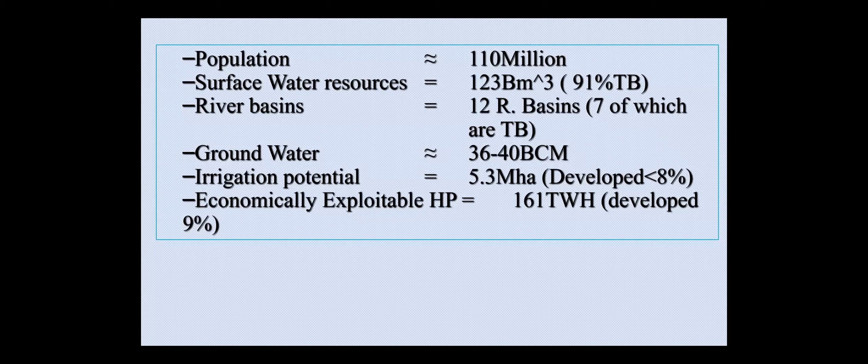This section gives an idea about the key challenges of water resource development in the country: rapid population and economic growth, which is significantly demanding food, energy, and water; and high spatial and temporal rainfall variability, which is also a critical challenge for water resource development, particularly in the agricultural and energy sectors, because of flow variability in the rivers.

High dependence on biomass - it's estimated that more than 70 to 80% of the population depends on biomass for energy - leads to deforestation and erosion. There is also a low level of water infrastructure, meaning few storage reservoirs or dams, so it's not possible to regulate incoming floods within such structures. This is also a challenge for water resource development in the country.

According to a World Bank study from 2006, Ethiopia's primary water resource management challenges are extreme hydrological variability and seasonality, and the international nature of its most significant surface water resources. This justifies why the World Bank has endorsed the need to develop more water storage reservoirs in Ethiopia because of these challenges.

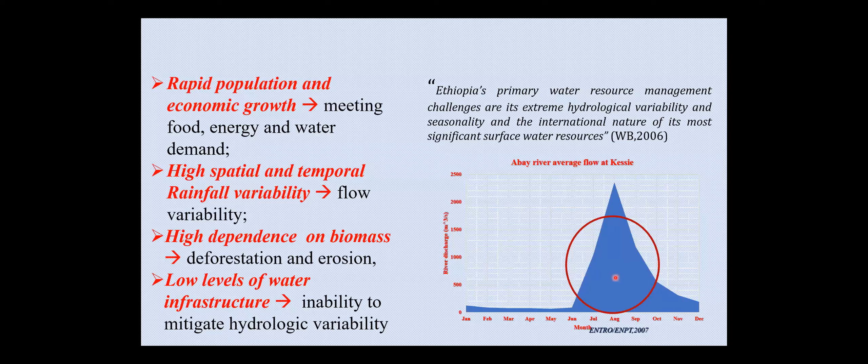This data, captured from different studies, shows the insecurity of food, energy, and water in Ethiopia. For instance, the first one on food security and life expectancy, a study done in 2008, shows that compared to neighboring countries like Sudan and Egypt, Ethiopia has lower life expectancy and lower average daily per capita calories, estimated at less than 2,000, while the others have more than 2,000 or even 3,000. This shows the food insecurity of Ethiopia as of 2008.

This figure gives an idea about access to electricity as of 2005. Compared to other developing countries in Africa, Ethiopia's access to electricity at that time was less than 20%. You can see Zimbabwe, Nigeria, South Africa, and Egypt for comparison, showing the access to electricity, or energy demand, at that time.

The reservoir storage capacity per capita, as I mentioned earlier, shows that Ethiopia has less storage capacity or water infrastructure. Compared to other countries in Africa and the world, Ethiopia has about 38 cubic meters per capita, compared to South Africa's 687, and North America's 5,981. This shows it has justifiably less storage capacity compared to other developing or developed countries.

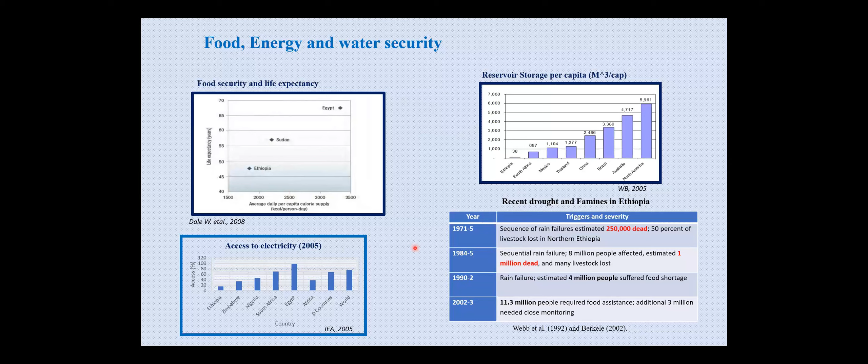This is just to give you an idea of the first dam in Ethiopia, called the Aba Samuel Dam. It was commissioned in 1939 with an installed capacity of 6.6 megawatts. It is a concrete masonry dam, located on the Akaki River, tributary of the Awash River, and its height is about 22 meters.

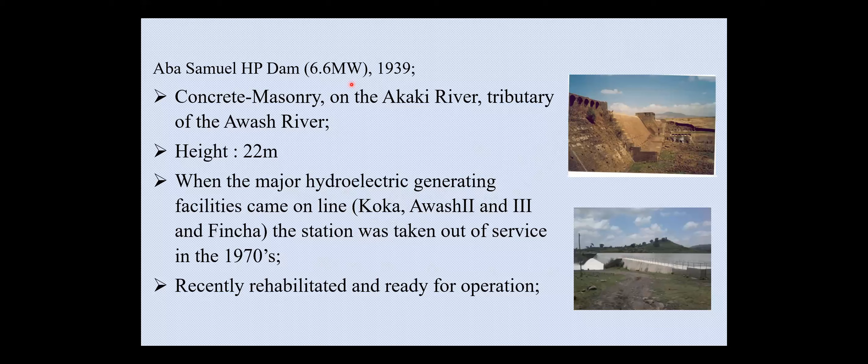So it is the first hydraulic dam, even the first modern dam in Ethiopia. But later, in the 70s, when major hydroelectric facilities came online—Koka, Awash, Awash 2 and 3, and Fincha—the station was taken out of service, and it was not operational since the 70s. But recently, it has been rehabilitated and is ready for operation to generate the 6.6 megawatts. So this is the first dam in Ethiopia.

In terms of classification of dams, we can say dams can be classified in terms of storage capacity and height, according to the definition of ICOLD. You can also classify dams in terms of potential consequence or impacts on population, property, and environment. In olden times, dams were usually classified in terms of storage capacity, but recently there is another criteria called the potential consequence classification.

So when you say large dams, according to the International Commission on Large Dams, that is a dam with a height of 15 meters or greater from lowest foundation to crest, or a dam between 5 and 15 meters impounding more than 3 million cubic meters. If the dam is in the range of these heights and storage capacity, we categorize it as a large dam.

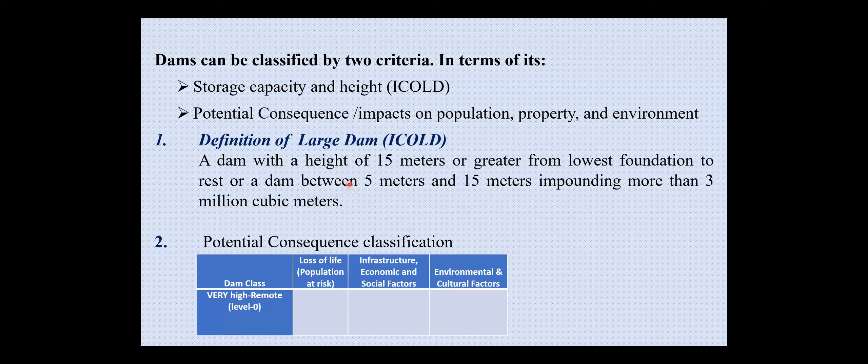The second criteria is more focused on the impacts on population, property, and environment. It doesn't recognize the storage or height—it's mainly about the impacts on downstream areas. For instance, on the Ethiopian side, the dam class could range from high impact to remote. The other criteria are loss of life, population at risk, infrastructure, economic, social factors, and environmental and cultural factors. So you can classify dams according to these two main classifications.

When you come to the Ethiopian side, the number of existing large dams in Ethiopia, according to ICOLD dam classification, is 38 large dams—meaning the height is more than 15 meters and storage capacity is greater than 3 million cubic meters. There are 5 under construction. This is based on the ETCOLD study from 2019. ETCOLD is the Ethiopian Committee on Large Dams—I'll explain more about that later.

In terms of potential consequence classification of Ethiopia's dams, we did some preliminary analysis about how they impact downstream areas. This shows where the 38 dams are categorized in terms of very high, moderate, low, and remote, giving an idea of where to focus dam safety management and what needs to be emphasized.

In terms of very high classification, this means the population at risk and potential for loss of life in the inundation area, the economic loss affecting infrastructure, public and economic facilities, and impacts on ecology, fisheries, water quality, wildlife habitat, and rare or endangered species. So it is categorized according to its impacts on population, infrastructure, and environment, ranging from very high to low or remote.

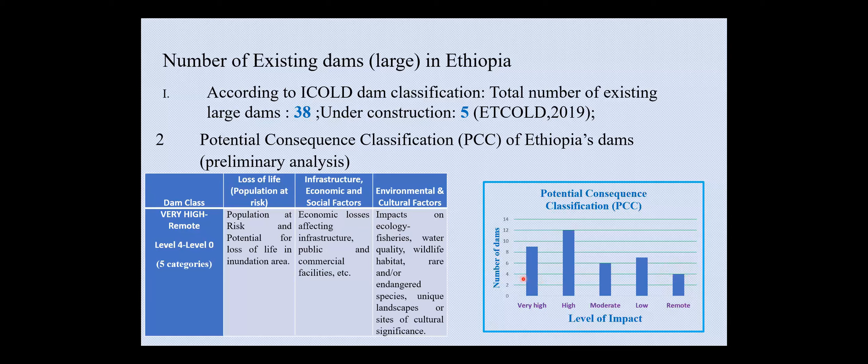ETCOLD, the Ethiopian Committee on Large Dams, has adopted interest potential consequence classification systems to classify Ethiopian dams. We call it the PCC. The PCC enables proportioning appropriate design standards, specifically those for flood and earthquake design, as well as defining level of surveillance and safety inspections, frequency, and parameters.

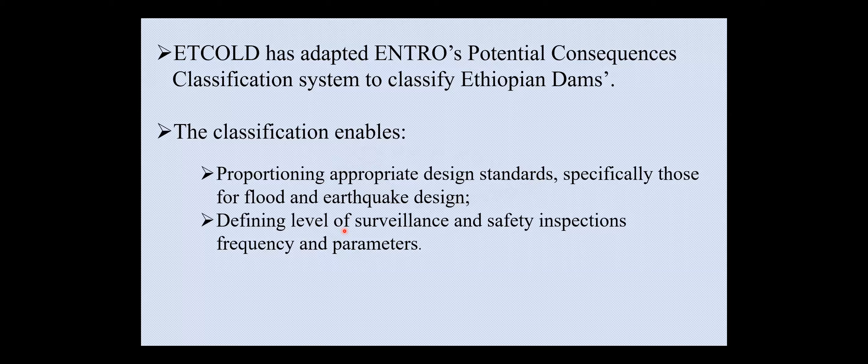Usually large dams, particularly in developing countries, are designed based on criteria developed in the Western world. But this classification was developed specifically for the Ethiopian context. It also gives you an idea of when you are going to inspect the dam based on potential consequence classification. If categorized in the high side, you have to regularly monitor it, and if it is on the low side, you don't need very rigorous dam safety assessment every year. This is one of the benefits of this classification in terms of its impact on the downstream area.

Total storage capacity at this time in Ethiopia is estimated at about 40 billion cubic meters, as I mentioned earlier. From these 38 dams, more than 90% is for hydropower generation. The storage capacity now is 364 cubic meters per capita. It was 36 in 2005, now it reached 364 cubic meters per capita.

Ethiopia's dam types, with these 38 dams, we have a variety of dam types. For concrete dams, we have arch dams, masonry dams, buttress dams, gravity dams, and RCC dams. For embankment dams, we have homogeneous zoned earth-fill, concrete face rockfill, asphaltic face rockfill, asphaltic core rockfill, and clay core rockfill dams. This shows Ethiopia is hosting different types of dams, giving an opportunity to examine the safety of different dam types.

Dams designed and constructed by Ethiopian engineers and construction firms number more than 20. This shows Ethiopia is not only hiring international contractors to develop its dams, Ethiopia has also developed its own capacity. More than 20 of these 38 dams have been constructed by Ethiopian engineers.

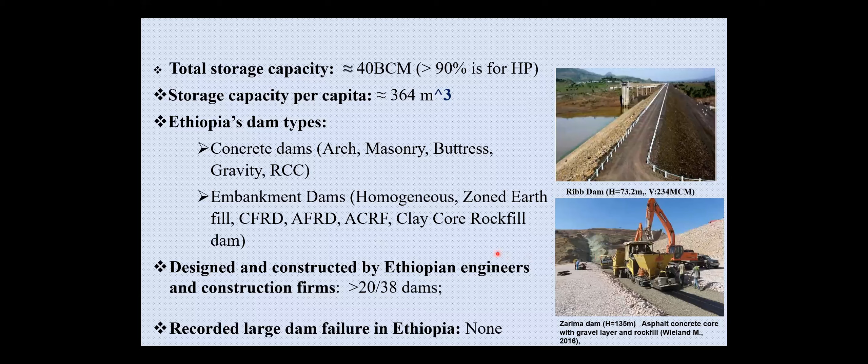These are some of the existing large dams showing how Ethiopia hosts very famous dams. The first, Legedadi Dam, is a water supply dam commissioned in 1970, with a dam height of 46 meters, intended for supply, nearest to Addis Ababa town. This dam has 4 types of dams in it: a concrete buttress dam, asphaltic concrete core dam, gravity dam and intersection wall, and asphaltic face rockfill dam. This is very unique, 4 types of dam in one site. It is very complex, so you need more interaction on the safety aspect of these dams.

This is the Tekeze Dam, the tallest concrete arch dam in Africa, with a height of 188 meters. This is the recently commissioned Gibe 3 Dam, the tallest RCC dam in the world at 246 meters. So you can imagine that we have not only been building dams, we have also been exercising safety management of large and very complex dams in Ethiopia.

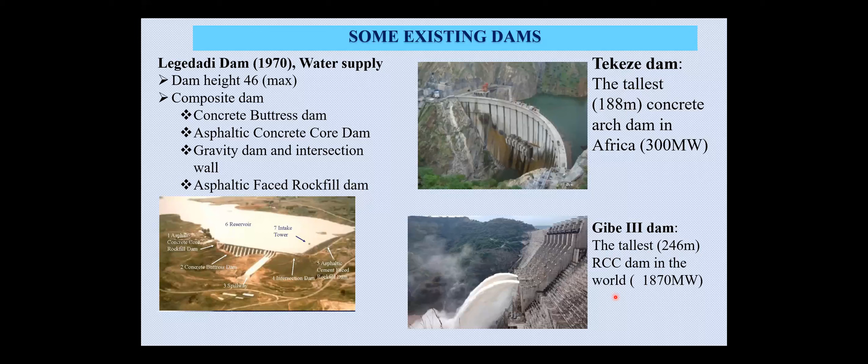Coming to the basic concepts, to give you an idea of the core principles of dam safety: ICOLD, the International Commission on Large Dams, defines 9 overarching principles for dam safety. I'll give you 3 of them. The first is that the fundamental dam safety objective is to protect people, property, and the environment from harmful effects of misoperation or failure of dams and reservoirs. This is the key, the overarching objective of dam safety.

You have to give more emphasis on the protection of the downstream community. Also consider the role of the dam owner: the dam owner has the prime responsibility for operational integrity and safety of the dam. It is not the government, not the contractor, not the designer or engineer, it is the dam owner who takes responsibility for operational integrity of the dam. The role of the government or regulatory authorities is usually provision of legal and institutional frameworks for pre-operational and operational integrity and safety assurance. The government has to set up proper standard legal and institutional frameworks to properly implement dam safety at the national level.

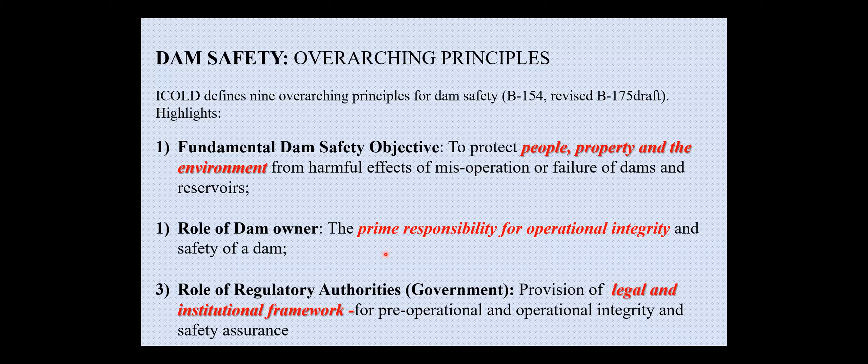To give you an idea about dam failure around the world, this is recently published by ICOLD, the International Commission on Large Dams. A dam failure is a catastrophic incident characterized by uncontrolled release of impounded water and/or total loss of integrity of the dam structure, its foundation or abutment. This is a general definition of dam failures.

There are some definitions by other institutions about dam failures; sometimes they call it dam incidents. This is the definition of ICOLD. Up to now, from ICOLD data, there have been 311 dam failures recorded out of the total 35,230 large dams listed in the World Register of Dams. So 311 dams failed out of these 35,230 large dams.

The graph shows which dam type is most vulnerable to failure: barrage, earthfill, and gravity dams. You can see total earthfill dams failed is about 209. The next one is gravity dams, which encompasses embankment components. When you say gravity dams, if there are embankment components on the right or left flanks, we call it gravity. Usually such dams are available in Sudan and Egypt - in the middle there is a gravity dam, but on the right and left bank or abutment it is more of a rockfill or embankment, earthfill dam.

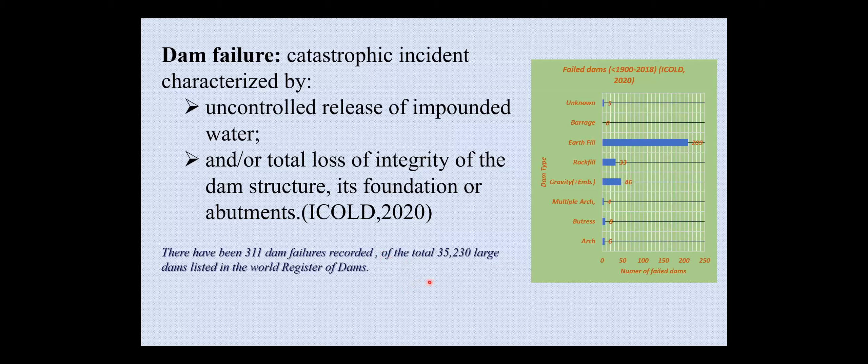This gives an idea of the main causes of dam failure, but studies show it is not only extreme events - experience has shown that many dam failures, and perhaps the majority of dam incidents, do not result from extreme geophysical loads but rather from operational events. It is not because of earthquake or flood alone; it is a combination of usual events and operational events. So it is not a single source or cause of failure - it is a combination of events that could lead to dam failure.

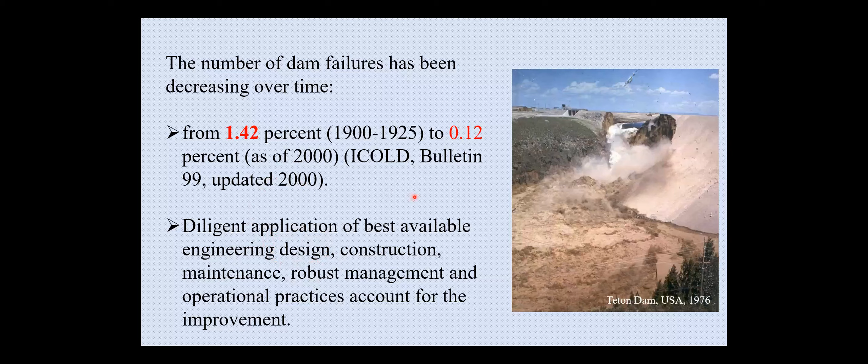The dam safety assessment approach - here's an idea of how you assess the safety of dams. There are two types of dam safety assessments: rational standard-based, and risk-informed decision-making, which has recently come into picture. The first one is more of a deterministic approach, based on recognized good practices and conservative safety margins, usually based on safety factors and loads. You would consider different types of dams and loads with this safety factor - it is an older style of safety assessment of dams.

The next one is risk-informed decision, which is current, emerging, integrated risks, rigorous, systematic, and widely practiced in developed countries. Actually, risk-informed could be classified or divided into two, that is in terms of quantitative and also qualitative approach.

So one of the qualitative approaches of this risk-informed decision is about the potential failure mode analysis, called PFM. This is the risk-informed decision-making approach introduced by FERC in the USA, and it is widely practiced in the United States of America. This type of assessment is also included in the Ethiopian dam safety guidelines. I'll give you some examples on how we assess our dams in Ethiopia.

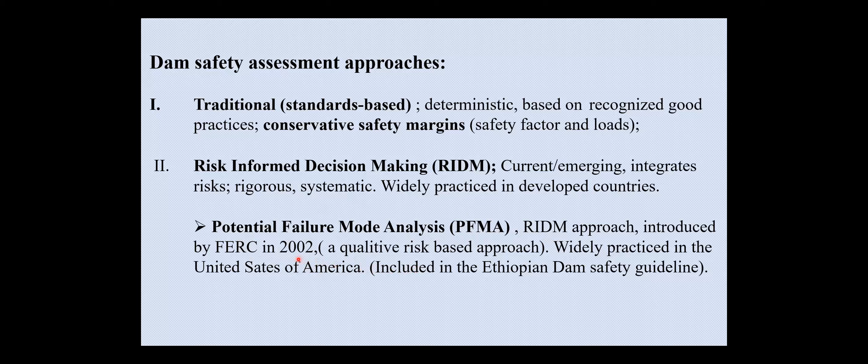Policy and strategy and guidelines. This is just to give you an idea about the development of policy and strategy in Ethiopia.

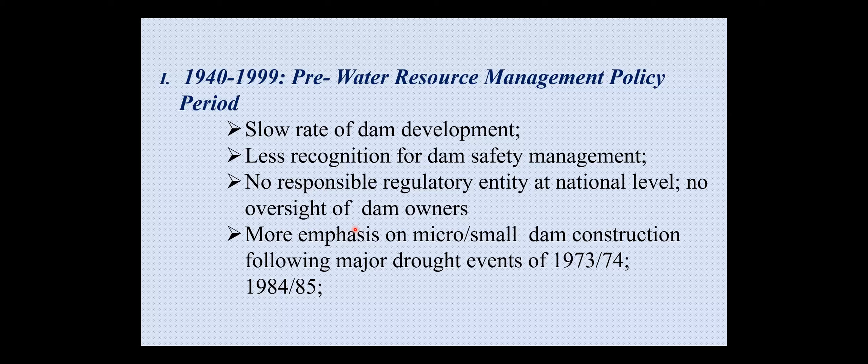From 1999 to date, the Ethiopian water resource management policy came into the picture in 1999. This is the Ethiopian water resource management policy endorsed in 1999, and this is the Ethiopian water sector strategy, which was approved in 2001, 2002.

This was the first time that the policy, the Ethiopian water resource management policy, included a component on dam safety. It says that under dams and reservoir management and operations, it provides guidelines concerning dams and reservoirs operations and safety procedures. In article 2.2.7, regarding disaster, emergencies and public safety, it aims to ensure and promote the safety of water retaining, transmission and diversion structures like weirs, barrages, dams, reservoirs, and pipelines against natural and man-made disasters.

Based on this policy, the strategy is to translate the policy into action. So the Ethiopian water sector strategy of 2002 says to ensure the safety of water structures and carry out periodic safety checks. This gives an idea or a way to emphasize and think about dam safety at national level.

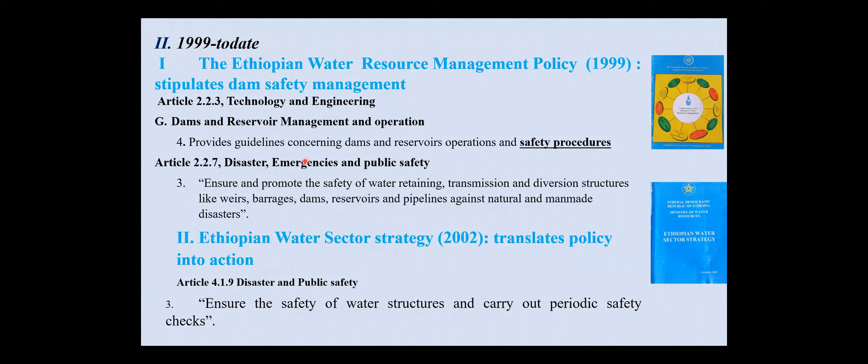Now, ETCOLD, the Ethiopian Committee on Large Dams, recognized the need to develop a national dam safety guideline, because of several reasons that needed to be addressed.

These reasons include the increasing number of aging dams, development and expansion of urbanization in downstream areas, growing number of large and complex dams being constructed and operated, growing need for increasing capacity of dam safety management, absence of dam safety guidelines and regulations, and growing threat of climate change impacts such as extreme events. Taking these challenges into consideration, ETCOLD suggested developing a national dam safety guideline.

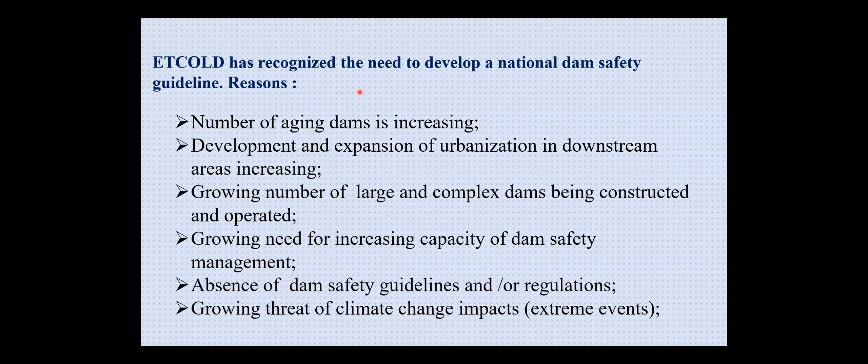So this is the dam safety guideline developed by ETCOLD in October 2014. The guideline draws experience from ICOLD, the United States Bureau of Reclamation (USBR), FERC, and also the Australian National Committee on Large Dams experience. It develops its guideline based on these experiences.

The guideline has 15 chapters and 4 appendices. The main content of the guideline addresses the entire life of the dam: planning, design, construction, operation, refurbishment and upgrades.

It gives you an idea about what issues or actions need to be taken in planning, design, construction, and operation of dams, and also presents the framework for dam safety management programs, defining the roles and responsibilities of regulators, dam owners, and specialists.

This will be discussed in more detail in the dam safety regulation, but in the guidelines, it was attempted to give a basic idea about the roles and responsibilities of the regulators and dam owners.

It gives a framework for the dam safety assessment approach, an idea of how to assess your dam, what approach should be taken, and what the frequency of safety assessment should be in terms of potential consequence classifications. It defines the frequency of inspection as per the potential consequence classification.

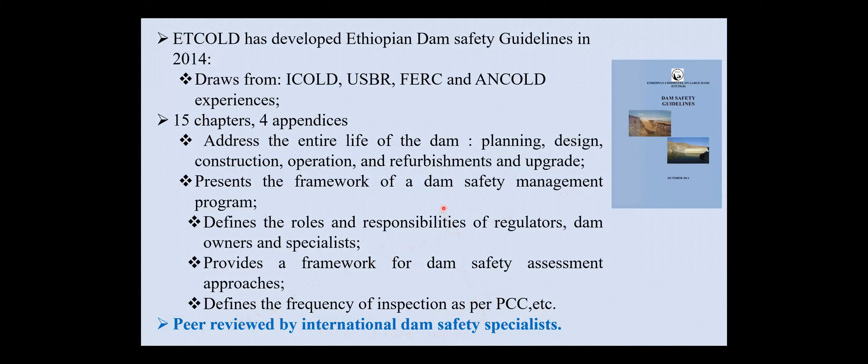Institutional aspects: this gives an idea of how institutional arrangements were made with respect to dam safety. In 2004, the Ministry of Water Resources assigned the Dams and Hydropower Design Department, as I mentioned earlier. After the policy was endorsed, thinking about dam safety at the national level began, and the department was assigned to oversee the implementation of the Ethiopian water resource sector policy and strategy with respect to dam safety. At that time, it was established under the Dams and Hydropower Design Department.

Accordingly, the department established a task team composed of civil engineers, geologists, electromechanical engineers, soil and environmental experts from the department, and undertook periodic visual monitoring and evaluation of dams, both operational and under construction. Actually, what they did was just to monitor and inspect the physical arrangement of the structures without doing any detailed assessment, and prepared field assessment reports highlighting identified issues and remedial actions recommended to dam owners. So finally, they submit the reports to the dam owners, what their findings are, also some issues and actions to be taken.

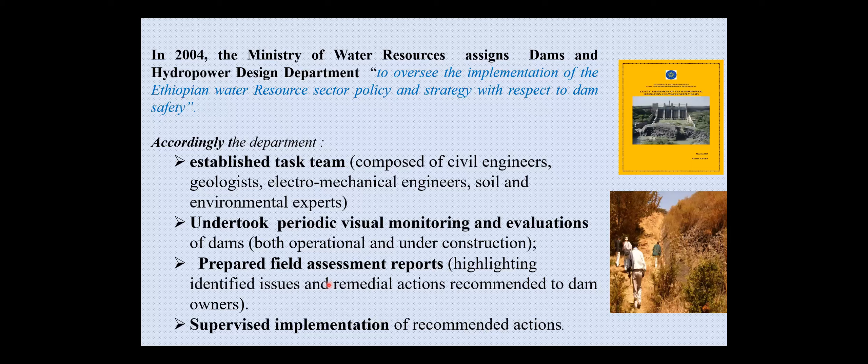ETCOLD is the Ethiopian Committee on Large Dams. It was established and became a member of ICOLD in 2007. ETCOLD is a professional association established to promote best practices in the planning, design, construction, operation, maintenance, and refurbishment of dams and associated structures. It supports government in capacity building, safety assessment, reviewing study and design reports, and developing guidelines. This is a professional association.

So it is a member of the International Commission on Large Dams, ICOLD. Some of you may know about ICOLD, the International Commission on Large Dams, established in 1928. It has more than 100 member countries.

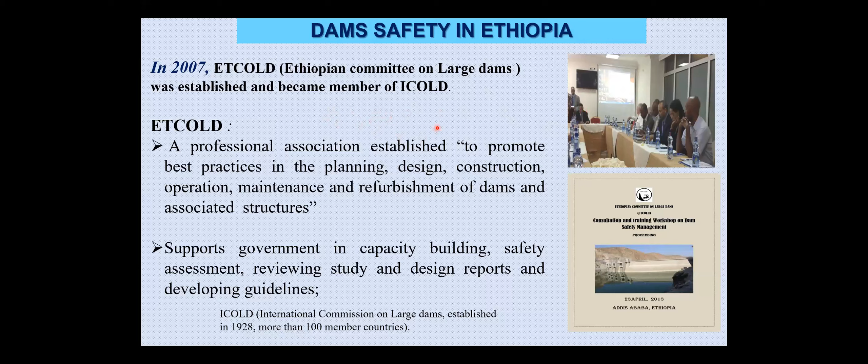These figures show that the Ethiopian Committee on Large Dams has organized training programs and consultation programs with dam owners, regulators, and academia. These are reports submitted after the consultation meeting. So one of the roles of ETCOLD is to organize capacity building programs or training programs for different stakeholders.

The Ethiopian Ministry of Water, Irrigation and Energy recognized the urgency of institutionalizing dam safety. Earlier it was done by the Department of Dams and Hydropower. Now the government has recognized that it needs to be a unit or independent department to address the safety of dams. So the ministry established a Dam Safety Directorate in 2016.

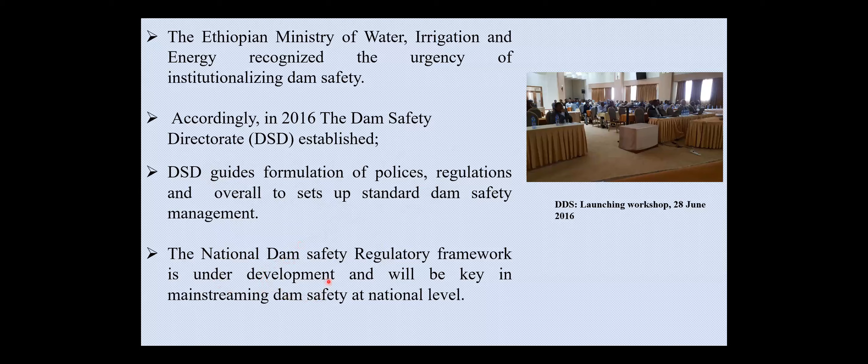Practice and experience about dam safety assessment: this is a situation assessment done for the Eastern Nile countries in 2016. There was a dam safety program for the Eastern Nile countries, that is Ethiopia, Egypt, Sudan, and South Sudan. The situation assessment came up with key findings regarding dam safety management in the Eastern Nile countries.

It found inadequate competence and institutional arrangements in planning, construction, operation, and safety management of dams. Dams are aged, particularly in downstream countries, constructed to old dated standards and technology. There is uncertainty due to climate change, with implications for operation and safety of dams. More water storage dams are being constructed, particularly on transboundary rivers, with inadequate regional basin-wide cooperation between countries, and incompatibility of safety codes, design criteria, and standards on dam design, operation, and safety management. Ethiopia's design codes and standards are different from those of Sudan and Egypt, showing a difference in codes and design criteria in the management of dams.

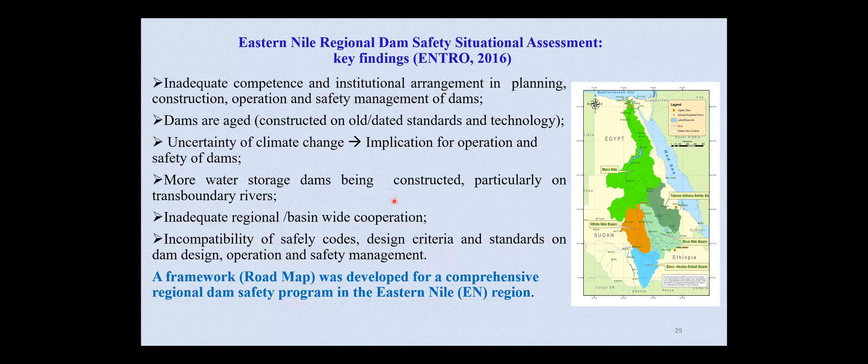To address these challenges or key findings, it was suggested to develop a framework or roadmap for a comprehensive regional dam safety program in the Eastern Nile region. The roadmap sets a timeline and key actions to be taken by the countries and regional institutions to address dam safety issues. In coordination with the Eastern Nile Technical Regional Office, one of the recommendations of the assessment is to enhance the capacity of experts in the Nile Basin countries, particularly the Eastern Nile countries.

In coordination with the Eastern Nile Technical Regional Office, more than 65 Ethiopian experts were trained, not only dam engineers or geologists, but also policymakers, dam owners, dam operators, and government and private construction firms. These all participated in the training programs. 6 large dams were assessed for safety: Tekeze, Koka, Koga, Fincha, Neshe, and Amerti. This is part of the Ethiopian side.

The safety of small dams in the Eastern Nile sub-basins was reviewed, and key issues in design, construction, and operation phases identified. On the right side, this picture shows Ethiopian experts doing their work or assessment of the Abebe Dam. They were at the Abebe Dams, and did the PFMA assessment with the support of one international consultant.

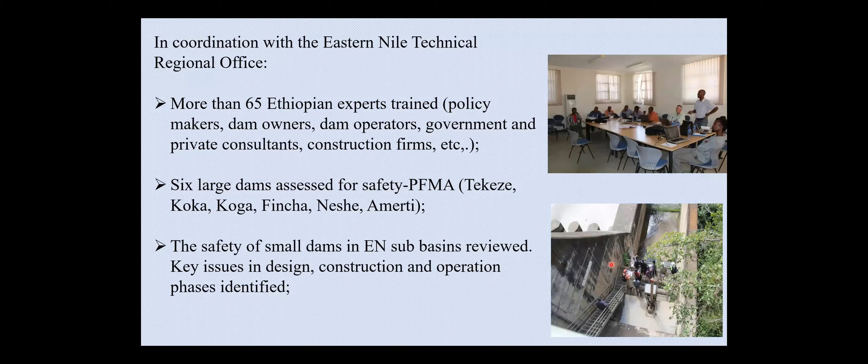This one is the assessment of Koka Dam in Ethiopia, the second large dam in Ethiopia, a concrete dam commissioned in 1960. This is a practical exercise of experts on the safety assessment of dams, an example of PFMA in Ethiopia at Koka Dam. This is just to give you an idea that it is not new for Ethiopian experts to assess safety of dams. They have good experience, having developed their capacity on safety assessment of embankment dams and concrete dams.

The Koka Dam is located in the Ethiopian Rift Valley system, commissioned in 1960. It is intended for hydropower generation, about 43 megawatts, but also has a regulation effect for downstream power plants. There are two run-of-river points downstream, Awash 2 and Awash 3, which depend on the regulated water of the Koka Dam. Overall, the aggregated capacity is about 107 megawatts.

The main dam is 426 meters long and comprises 3 sections: a concrete buttress spillway with 4 radial gates, maximum height above foundation 42 meters, and earth embankment saddle dams 3 kilometers south of the main dam. As I said, it is located in the Ethiopian Rift Valley system, more or less in a seismic area, so Ethiopia also has experience in managing and constructing dams in seismic areas.

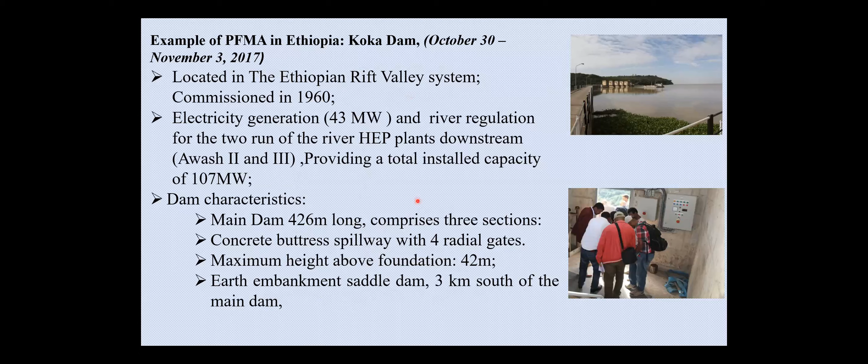During the potential failure modes analysis, we identified about 23 potential failure modes. Just to clarify, it is not a failure mode but a potential or possible cause of failure of the dam, or a possible cause that could trigger the loss of integrity. We emphasized the main dam and spillways. Out of these 23, overall the integrity of the main dam was found to be in good condition.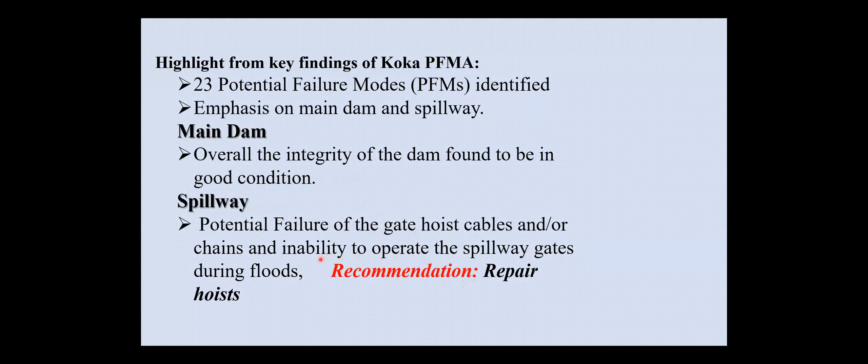Imagine this dam has served more than 60 years, but the integrity is still in good condition. In the spillway, there was a potential failure of the gate hoist, with problems in the hoist cables or chains and inability to operate the spillway gates during floods. It was recommended to repair the hoist before flood season. Also, a well-established meteorological and flood forecasting system needed to be in place, but at that time it was not there, so the recommendation was to introduce effective hydrometeorological forecasting systems.

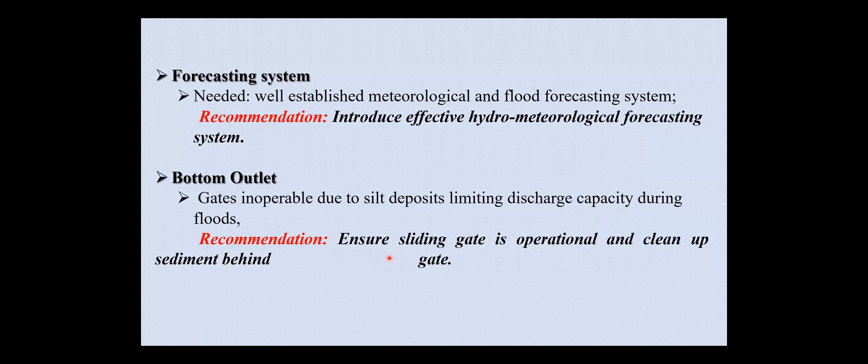The reason this was suggested is because reservoir operation depends on the reservoir level and the incoming flood at that time, so it was suggested to introduce effective hydrometeorological forecasting systems. The bottom outlet was also one of the potential failure modes identified. The gate was not operable or functional due to silt deposits limiting its discharge capacity during floods, so the recommendation was to ensure the sliding gate is operational and clean up sediment behind the gate. These are some of the issues identified and suggested for further action.

After the review process, the Dam Safety Directorate under the Ministry of Water, Irrigation and Energy has been following up on owners' actions on the recommendations, properly tracking implementation by the assessment team. It has been confirmed that all hoists were repaired in 2019, and the spillway properly discharged the 2020 high flood. The Hydrology and Water Source Quality Directorate under the Ministry of Water, the regulator, in collaboration with the Ethiopia Meteorological Authority, developed a modeling tool scheduled for a pilot test in the upcoming 2021 flood season.

The sliding gate was opened and started operation since January 2020, and the sediment load upstream of the gate had been cleaned. This was already confirmed by the Dam Safety Directorate.

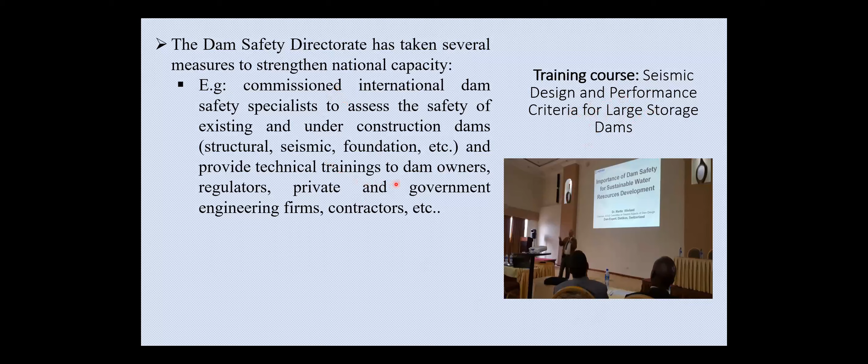This is one of the international dam safety experts, who is also the chairperson of the Seismic Committee of the International Commission on Large Dams. He provided training on seismic design and performance criteria for large storage dams. So the Dam Safety Directorate is also doing a good job on capacity building, addressing different issues related to dam safety aspects.

The next section is just to give you an idea. I'm not going to detail the safety of these structures, but show what is going on at the Grand Ethiopian Renaissance Dam. These are some of the features and characteristics of the dam. The GERD is designed and being constructed with state-of-the-art dam safety practices to suit site conditions and the intended purpose of the dam.

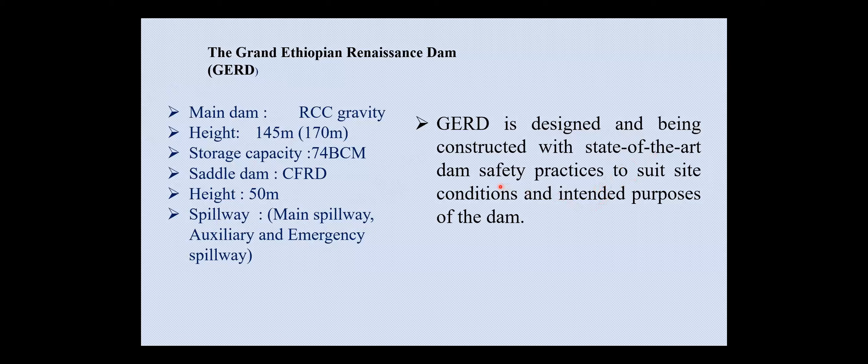In March 2011, a National Dam Safety Panel of Experts, a technical advisory panel, was established by the ministers. The main objective of this panel is to advise the government on GERD dam safety related aspects. The members of this committee are from private and government consulting firms, construction companies, dam owners, academia, and regulators. This panel meets regularly and reviews progress made, with site visits and report reviews.

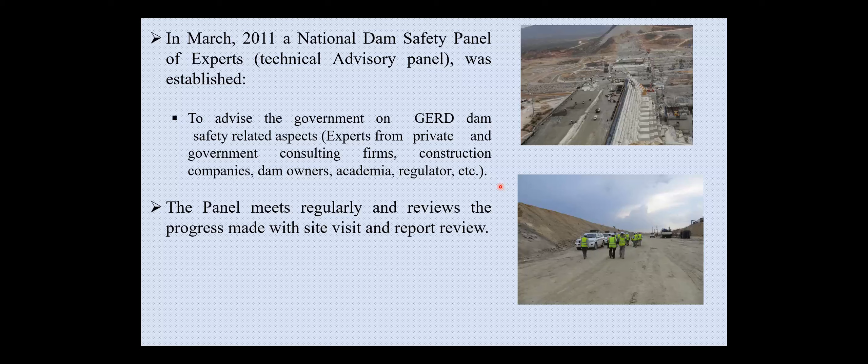This gives you an idea that, in addition to the international panel of experts, the government has also assigned a technical team with good experience in dam engineering to advise on safety aspects. In addition, the government of Ethiopia invited, in good faith, Egypt and Sudan to form an international panel of experts to review the design documents of the GERD.

As most of you know, in 2012 the International Panel of Experts, the IPoE, comprising 4 international and 6 national experts—2 each from the 3 countries—was established. The panel reviewed the design documents and construction process in line with international standards, practices, and guidelines.

In May 2013, the panel submitted its findings and recommendations to the governments of Ethiopia, Egypt, and Sudan, highlighting key issues to be addressed by Ethiopia in terms of construction and safety aspects. One of the tasks of the National Panel of Dam Safety Experts is to oversee implementation of the IPoE recommendations, and it is closely following the implementation into action.

This also shows that the dam safety of the GERD project is going well, because in the Agreement on Declaration of Principles between the three countries—Egypt, Ethiopia, and Sudan—signed in 2015, Article 8, the principle of dam safety, stated that the three countries appreciate the efforts undertaken thus far by Ethiopia in implementing the IPoE recommendations pertinent to GERD safety. Ethiopia shall, in good faith, continue full implementation of the dam safety recommendations as per the IPoE report. This recognition is also given to the standard practice of dam safety management, even during construction of the GERD project.

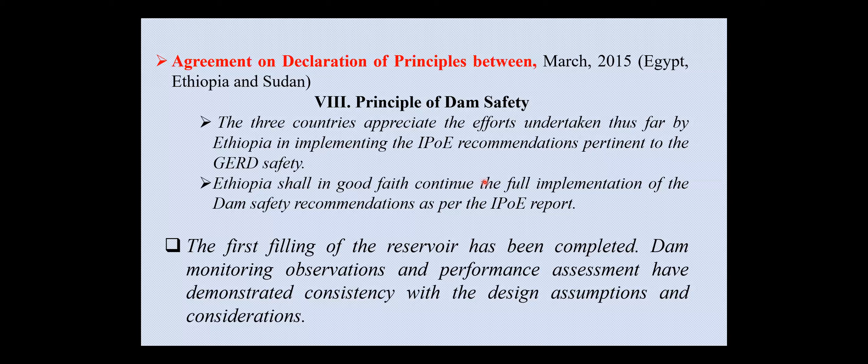So, the conclusion and key message: Ethiopia has progressively built national capacity in the design, construction, and operation of a range of dam types, sizes, and complexities, as shown before. Many types of dams with different ranges of heights exist in Ethiopia. Ethiopia has succeeded in nationalizing dam safety; commensurate policies, strategies, and guidelines have been formulated. This is a good step, and requisite capacities are being built and expertise expanded. So progress made so far has regional significance—not only for capacity development on the Ethiopian side, but also for downstream countries.